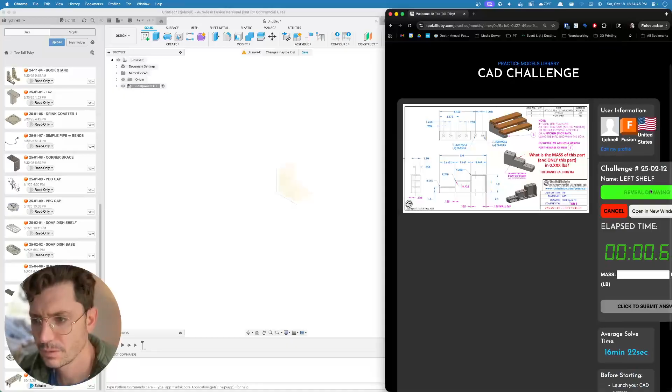Okay, what do we got? We have some notes. First off, let's change it to inches. That'll save us a lot of pain.

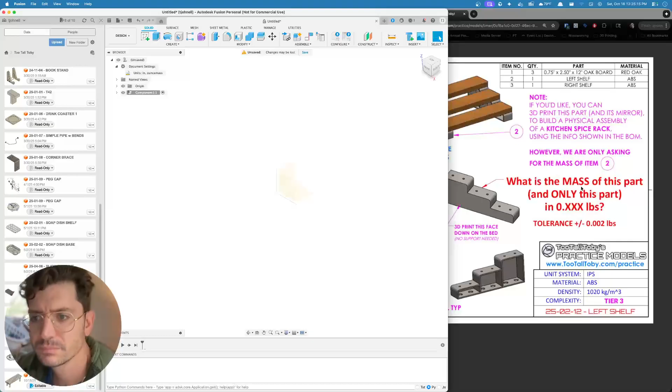Okay, it's this kitchen spice rack. We're only asking for the mass of item 2. So we only really need to 3D model number 2.

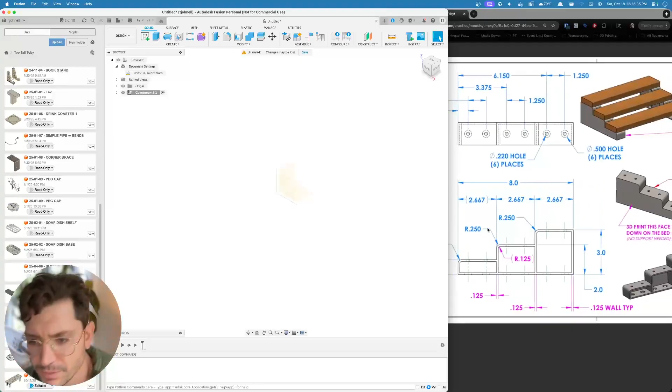And what do we have? We've got, basically, I'm surprised it says no symmetry. I mean, I feel like these are symmetric around this axis here.

I feel like what I want to do is just sketch this whole outside perimeter, and then extrude it, fillet, and then holes. So it would be sketch, hard angles, sketch, sketch, sketch, extrude the whole thing, fillet, fillet, fillet, shell, shell, shell, and then holes.

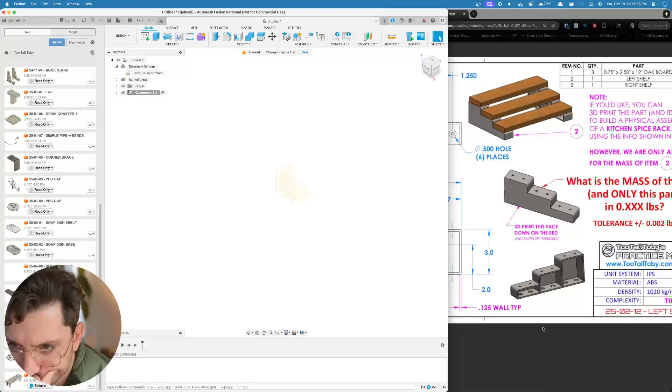Let's give it a shot. So we'll do - no, that's not what we wanted. We want to do a sketch on that plane.

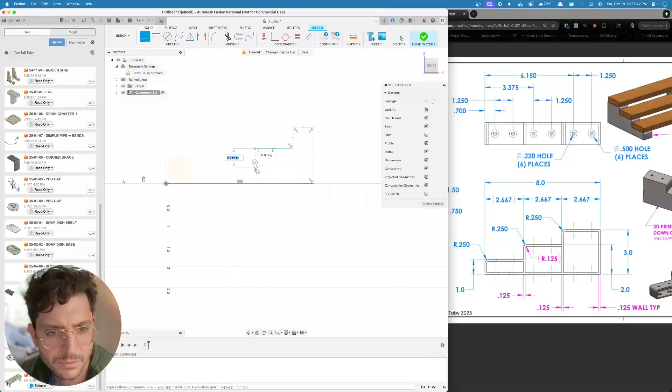I'm going to try to be more rough with my initial sketch and just lean on dimensions. So let's try that. I'm typically trying to be too precise in the beginning, and I think it's helpful just to get the rough sketch done before you worry about the length of everything.

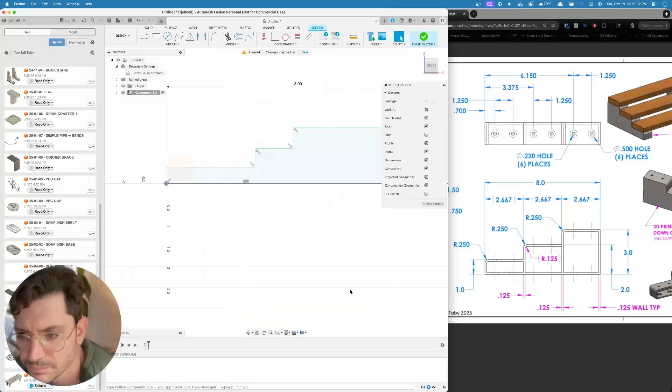So we know this distance between here and here is 8. Okay.

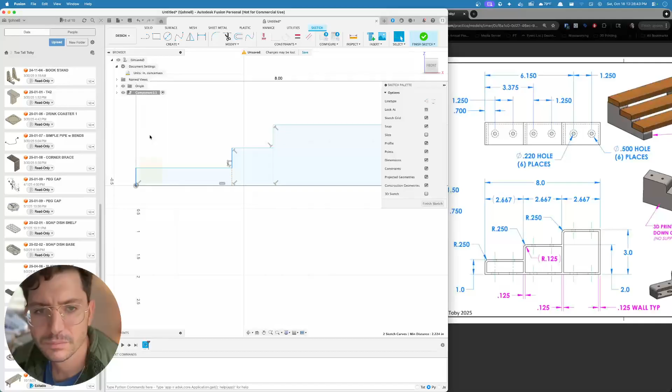I'm actually going to do some construction lines down. I think that'll help with doing some offsets. And then we're saying the distance between here and here is 2.667, which feels like it's just 2/3. So 2/3, 2/3, 2/3.

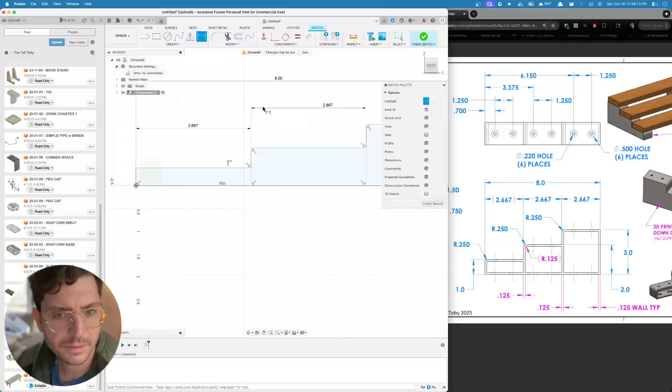But I'll do basically 2 plus 2/3. And then same for here to here. Or we just do 8 divided by 3. How about that? That makes it a little bit more obvious. That's 1/3 of the full distance.

In fact, let's go even better. Let's say it's d1 divided by 3, right? That way we could actually, if we do end up making this thing and printing it, if we want to...

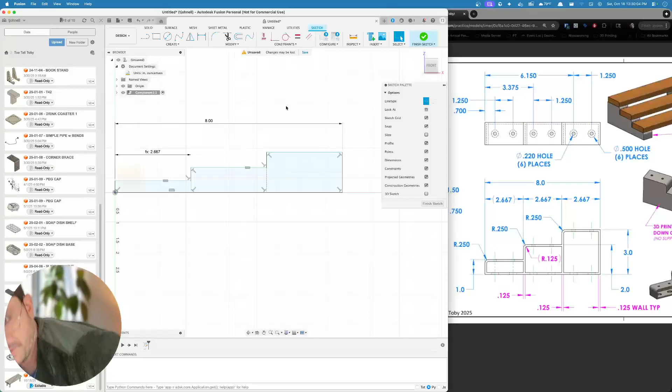That's another thing too, is we could just say this is equal to this, and this is equal to this. I guess that's kind of forced to be the right length if these two are equal, right? Because it's the only distance it can be. So I think those are fully constrained. I shouldn't be able to, yeah.

And then we know this is 3 between here and here. Let's do that. And then this distance here is 1. So I think it's pretty obvious that this distance here is going to be 2. It is, in fact, 2. Okay.

All right, and then we've got some interesting things going on. We want to do an offset. Let's do a break here. Sorry. Let's break that here.

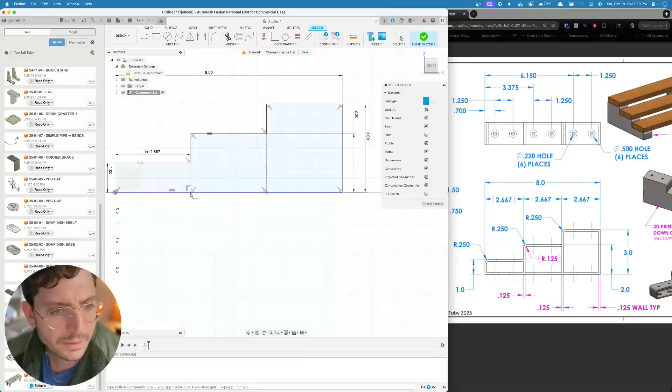Oh wait, we decided we were going to do shell, right? Yeah. So at this point, we've got the basic shape, so let's just extrude it.

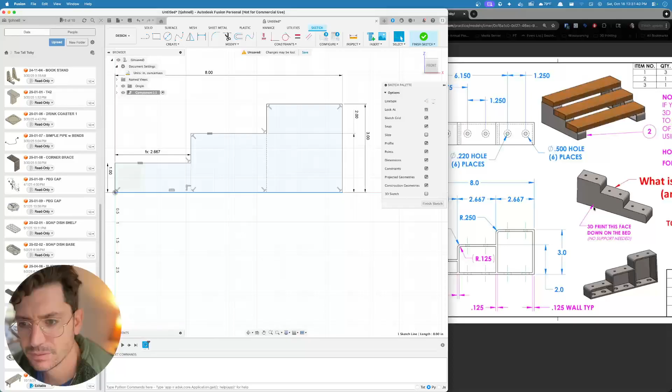Which is 1.5. Oh no. Go back. Is my clock still going? Okay.

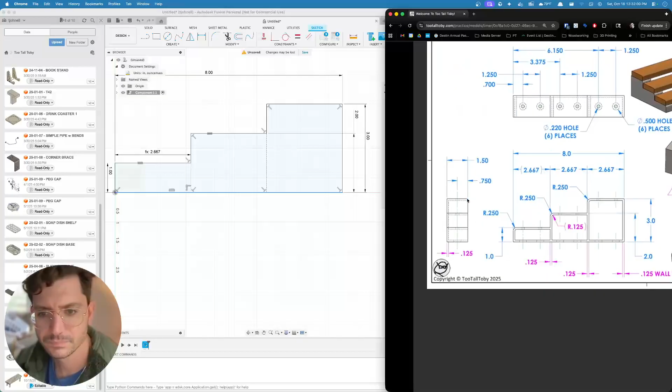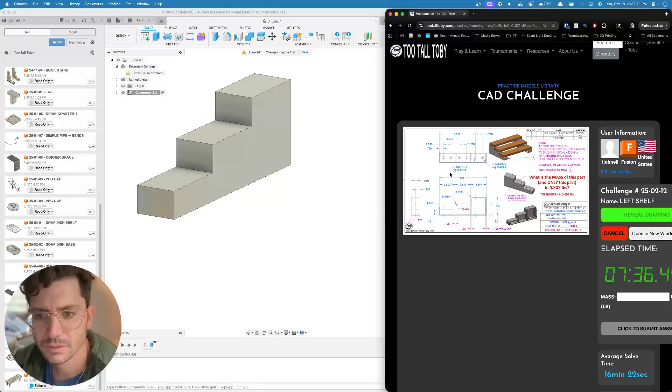Nice. Oh, my touchpad is messing me up because I'm not zoomed in enough, I suppose.

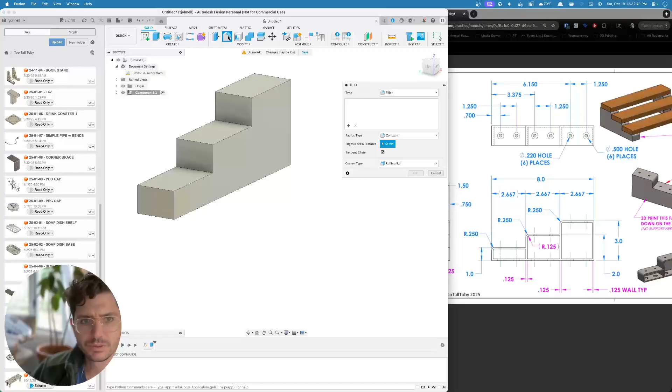Okay, so let's fillet those edges, 0.25. Yep.

And then what's interesting about this is the fact that it's sort of like a shell. However, this is not offset from this line. It's actually - which is really quite interesting and annoying at the same time.

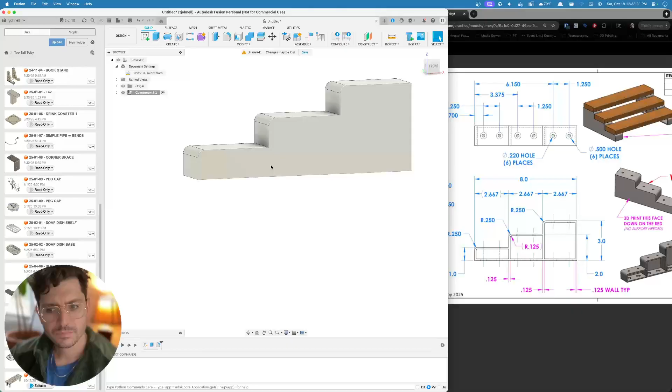I'm trying to think of what's the easiest way to do an offset on these 3 sides, but not here. What I could do is just do a sketch along this plane and then do an offset of this whole thing first by 0.125.

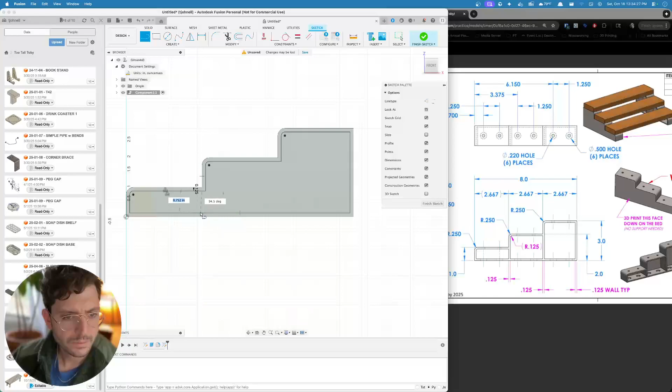And then you can just do some lines down. As long as this and this are vertically aligned, that's good.

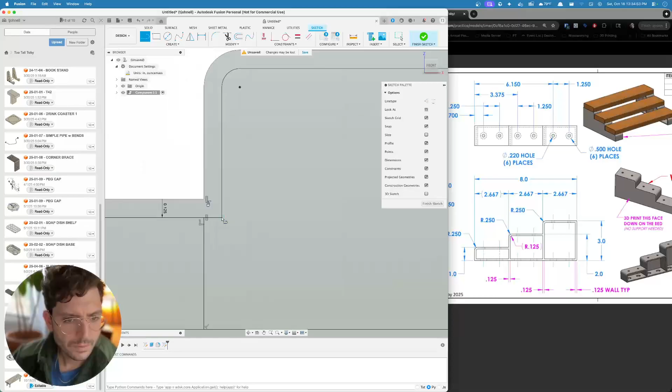And then we can just take this line and bring it down. That actually worked out okay. I don't mind that approach.

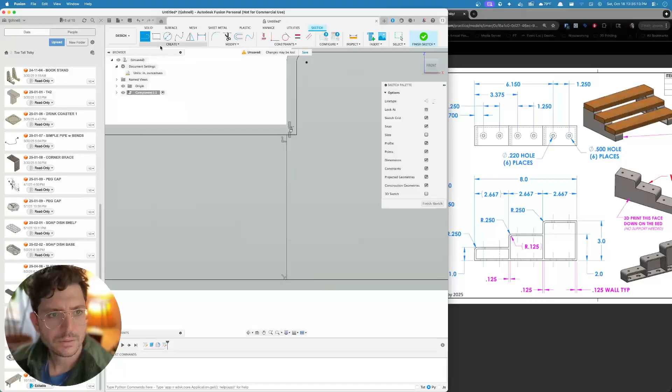So same with this. Let's get these vertically aligned. And then get that going. And then we can easily just shell this, which is this command.

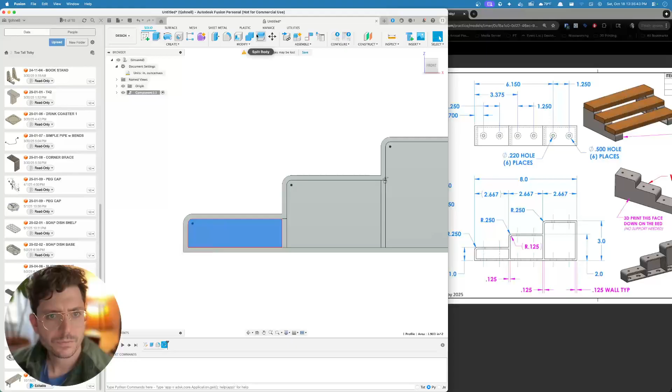So if I shell—actually I don't really need to shell it at this point, I just need to extrude it to distance, but give it that plus 0.25 thickness.

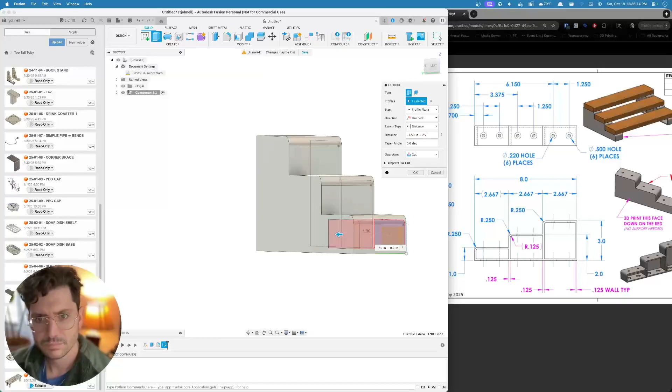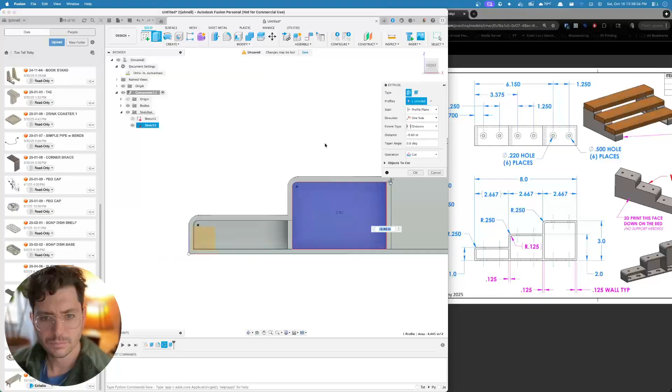I don't know if this is the right way, but we know what it is. It's 1.5 minus 0.25, negative plus 0.25.

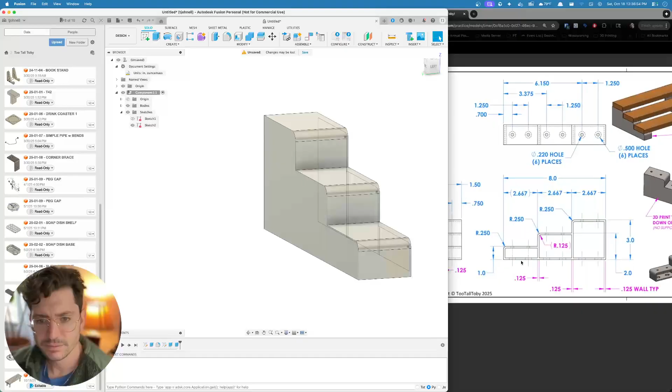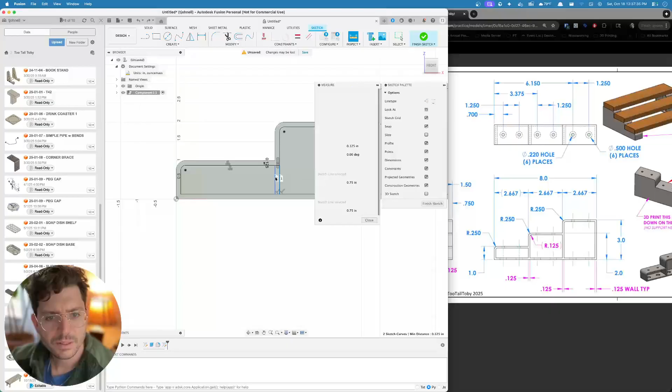Or is it 0.125? Darn it. Hold on. Oh boy, I think I screwed up that original offset way back at the beginning. Or no, 0.125, okay. That means this is probably 0.125, we can inspect it. 0.75? 0.125, okay. We're good.

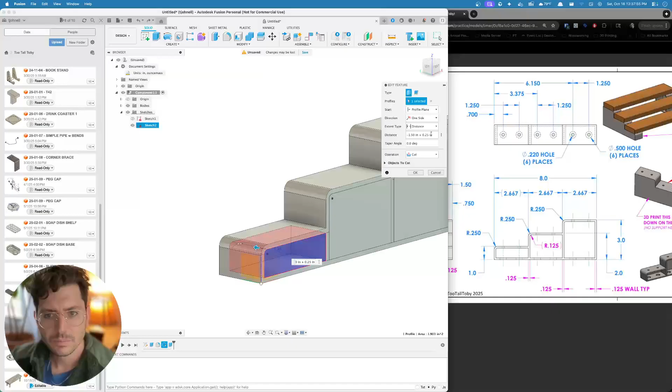But this extrude you got wrong. That should be plus 0.125. There we go.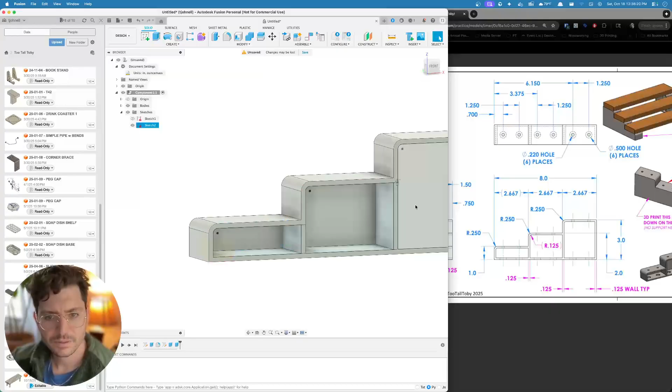I'm going to copy that formula. Actually, we should be able to say change to object and then just grab that same wall. Same thing here. To object, grab that wall. Okay.

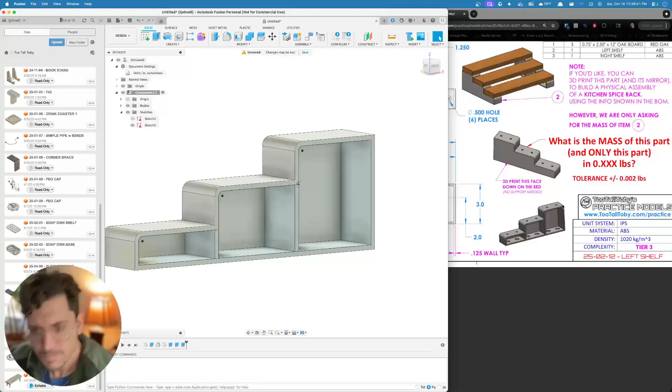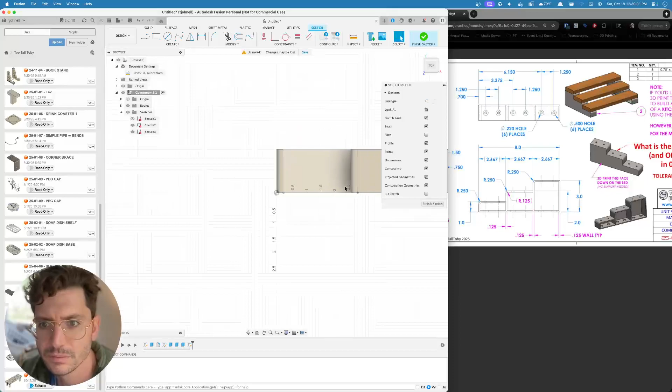And now we're going to do some holes. Oh, I did it again. So let's look at this plane. We're going to sketch on this plane. Okay.

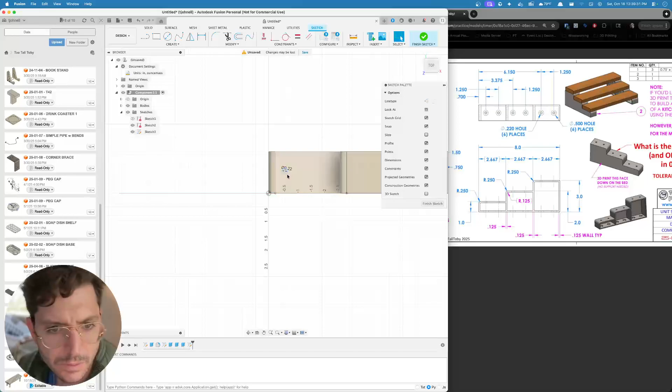A 0.22 hole. Two of them. Okay, what? Sure, okay.

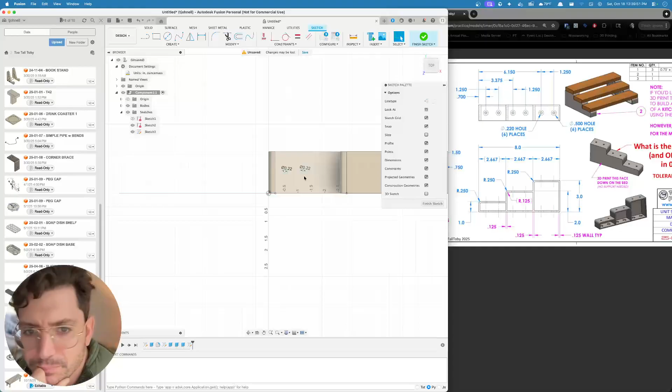And we want these to be horizontally aligned. Okay. And we want their distance apart to be 1.25. Oh, what the heck am I? I don't know where that came from. Do I have a bunch of these that I just copied around?

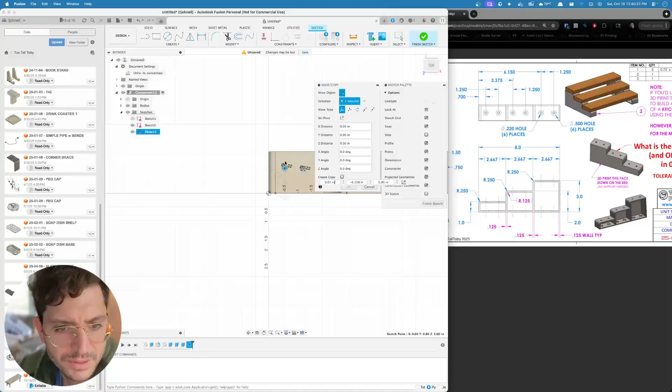What is this point? There we go. Okay. Now the distance between those, 1.25. And then the distance from here to the edge is 0.7.

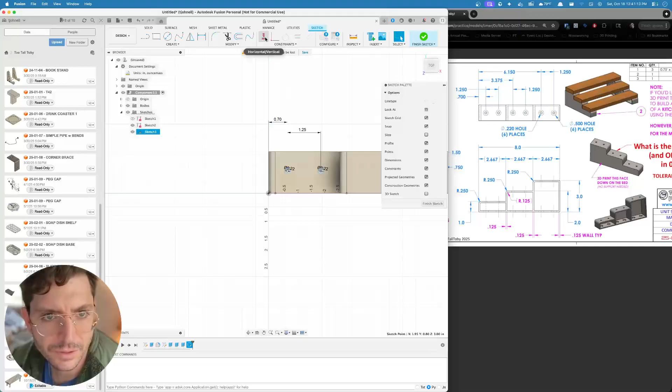And then the distance—this is centered with this. This is my new trick. I hold shift and I can grab—

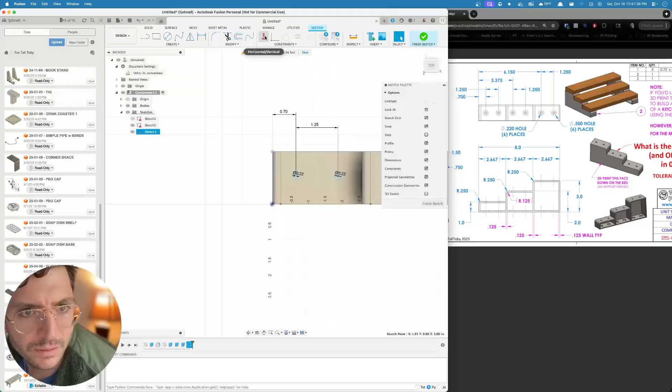I think I need to project that line. I can do that. Project this. Okay. So now I want to horizontally align the midpoint. Oh, that's so easy. I love that.

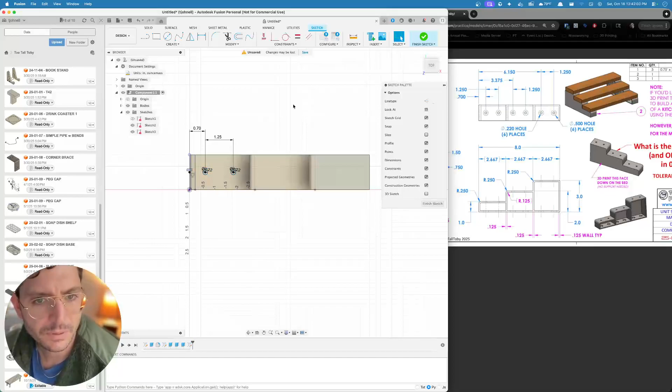Can we create some copies of that? We sure can. I like that a lot. Let's do that again. Okay.

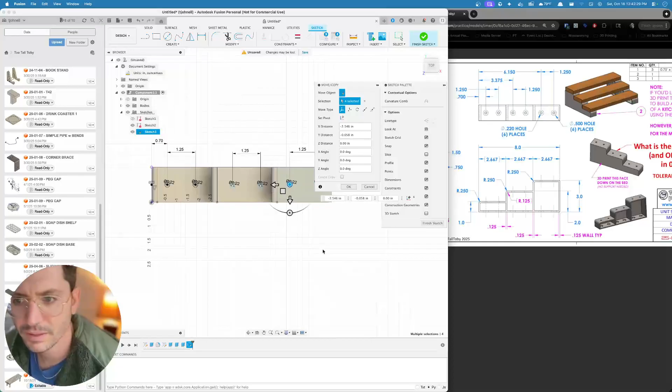And this is 3.375. Oops. I'm not so used to that move command. 3.375.

This is vertically aligned or horizontally aligned with that. Good. And then let's do another one. This is 6.15. Perfect. And again, this is going to be horizontally aligned with that midpoint.

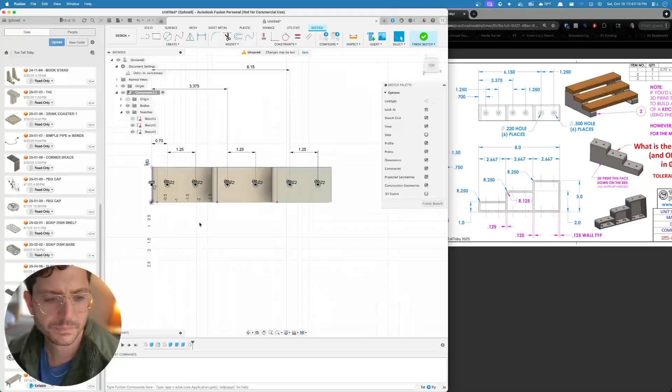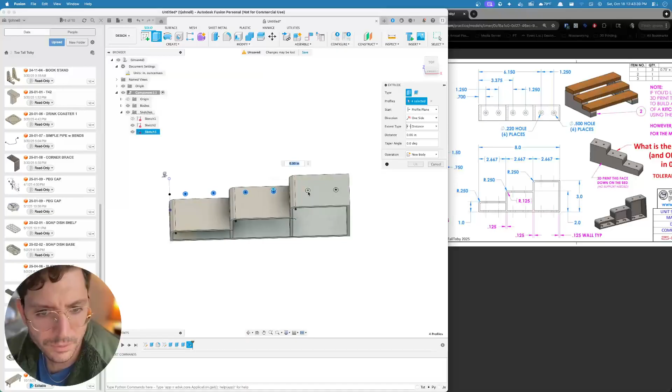And then we'll just extrude, boom, boom, boom, boom. I love saying boom, boom, boom. We'll bring it all the way down to object this. Okay, so those are done.

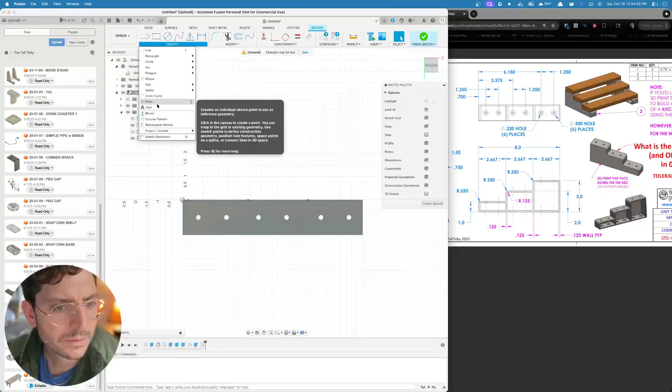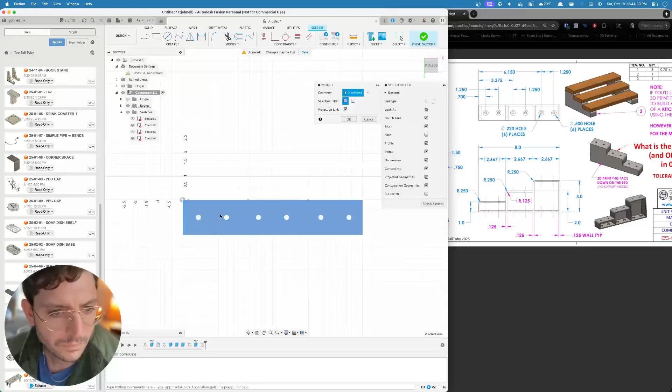Now we just need to project. Actually, I don't even think I need to project. I might need to. All right. So let's project this, this, this, this, this, and this. Perfect.

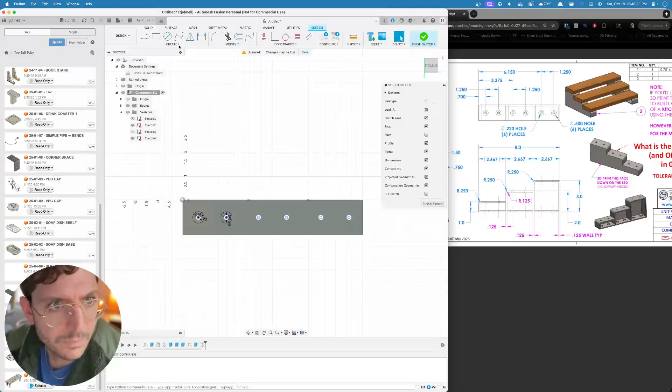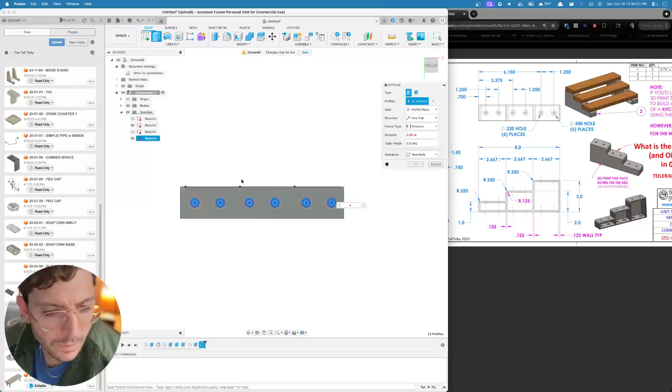And we got 0.5 holes. Extrude those. Through to object. Okay.

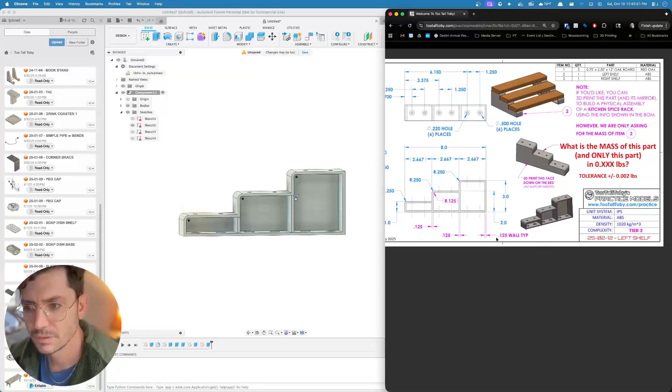I think that about does it. And we're doing ABS for this.

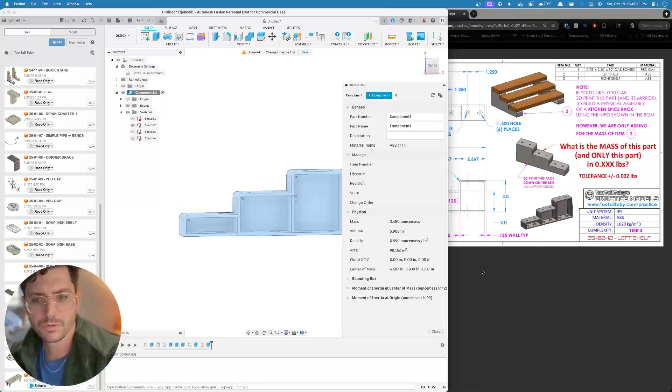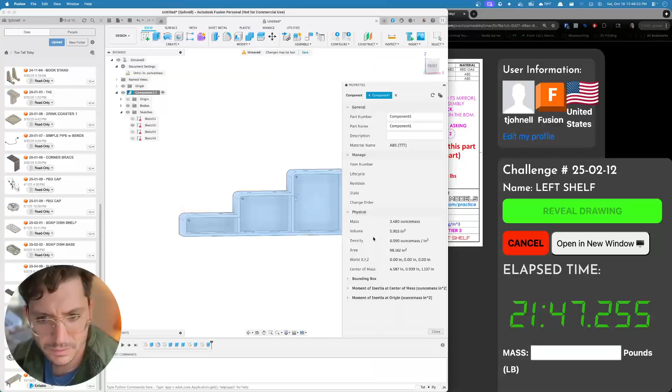Let's get the properties. We've got 3.48 ounce mass. In pounds, 3.48 divided by 16 is... 3.48 divided by 16. Is that what I wanted? Okay, done.

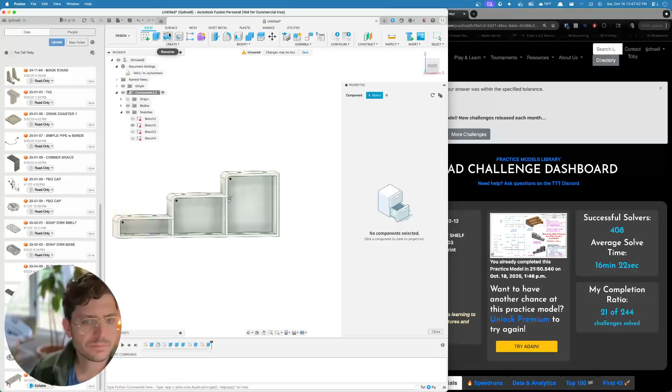Now, would I have done anything differently? It wanted you to use, let's see, hole tool. I didn't use that. I just like using the circles. I don't know what rib is. I've never heard of rib. Oh, interesting.

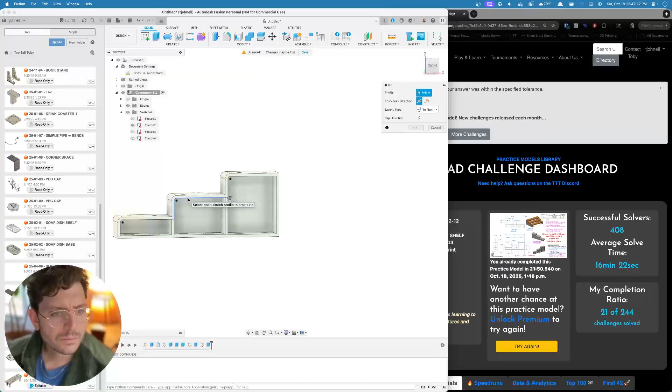Let's look at rib. Creates a thin feature from an open sketch profile. Extruded to the nearest face on a solid body. The rib feature is extruded in a direction parallel to the sketch plane. Extruded parallel to the sketch plane.

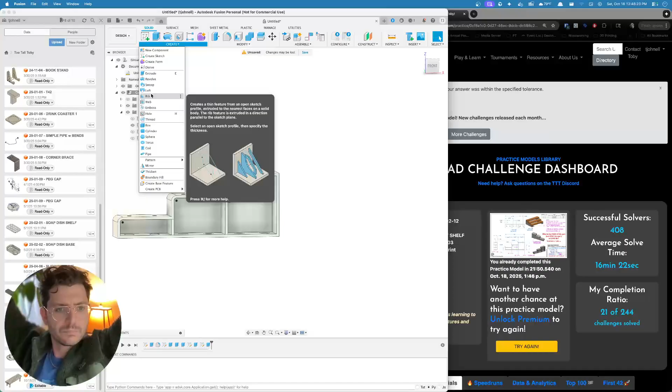Trying to think of why that would be helpful. Let's try this out.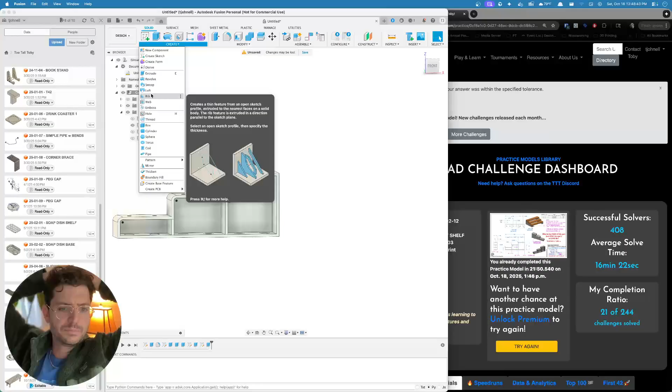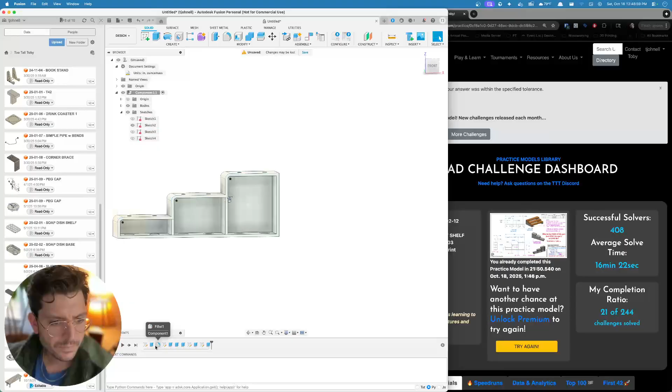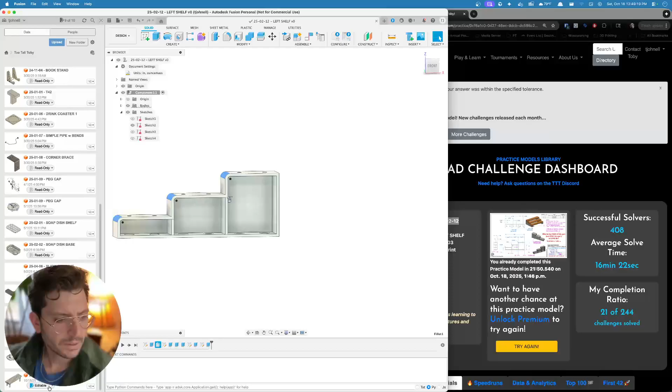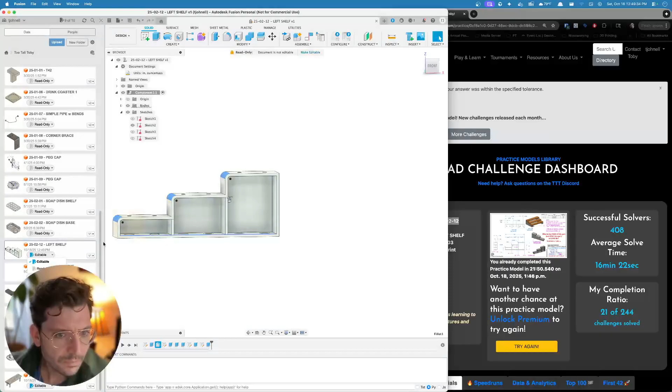All right, let's back this up. So I'm going to save this, called left shelf. And then let's create a copy.

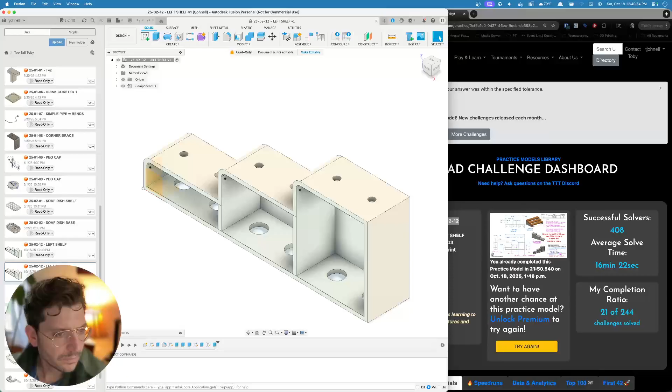And then let's close this. Open it. Let's back this up. So—

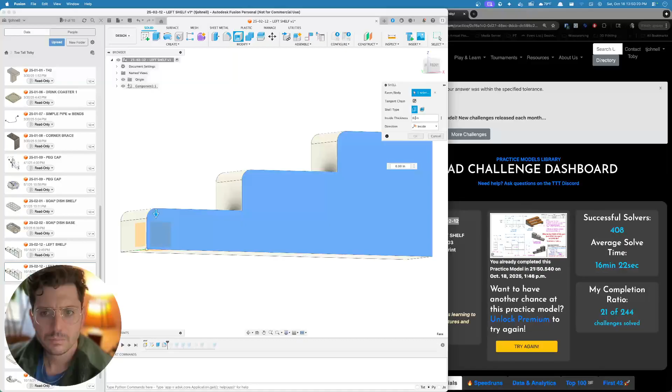Theoretically, maybe I can shell this with a thickness of 0.125. Okay. And then—

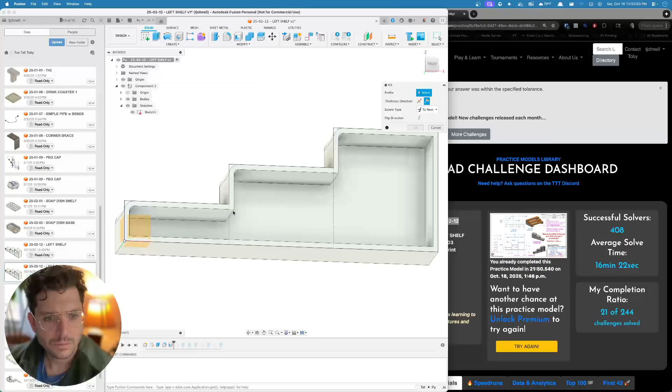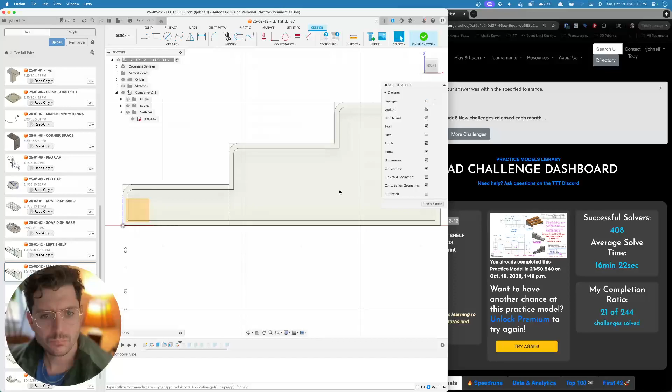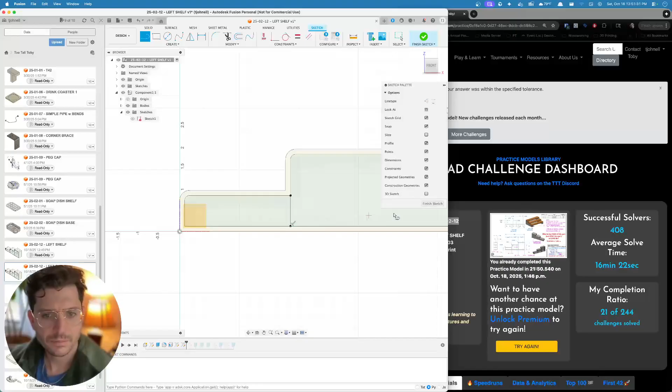Trying to think of how we might use the rib tool at this point. Select profile. Wondering if I do like a line down. Okay. Finish sketch. And then do rib on that. Thickness 0.125.

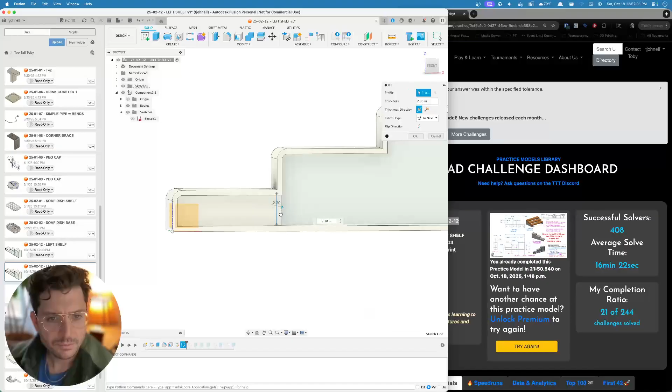I clearly do not know how ribs work. I'll have to do some research. Anyways, that concludes this video.